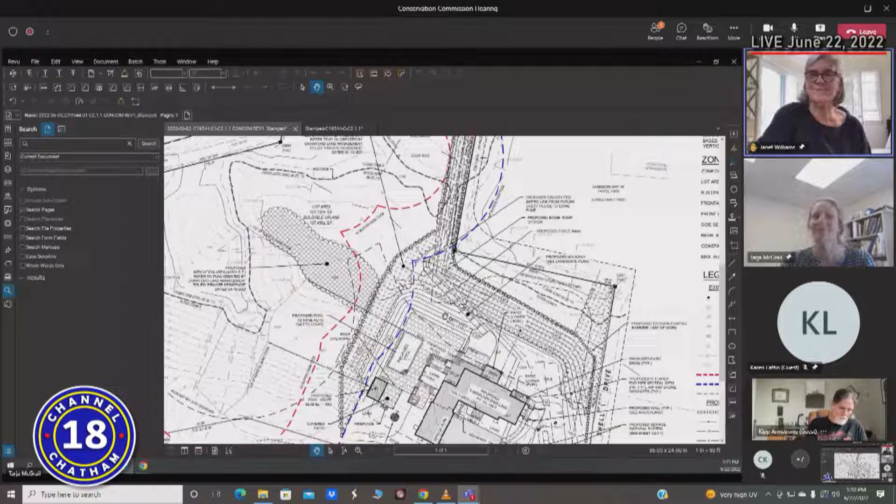Okay, you got another one? Go ahead, just one more question, quick. The mitigation will remain the same, correct? The amount of mitigation, correct? Okay, thank you, no changes to that plan.

Okay, all right, so just to make sure, we don't have a revised planting plan, and that is because even though there's a fairly significant movement of coverage out of the resource area, the location, number, and type of those mitigation plants are unchanged? That's correct. Okay.

Right, there will be no additional vegetation, shrub, or trees cut as a result of moving the path? No, the path is now located in the area that was always going to be disturbed by the utility installation, and that's part of the full restoration area.

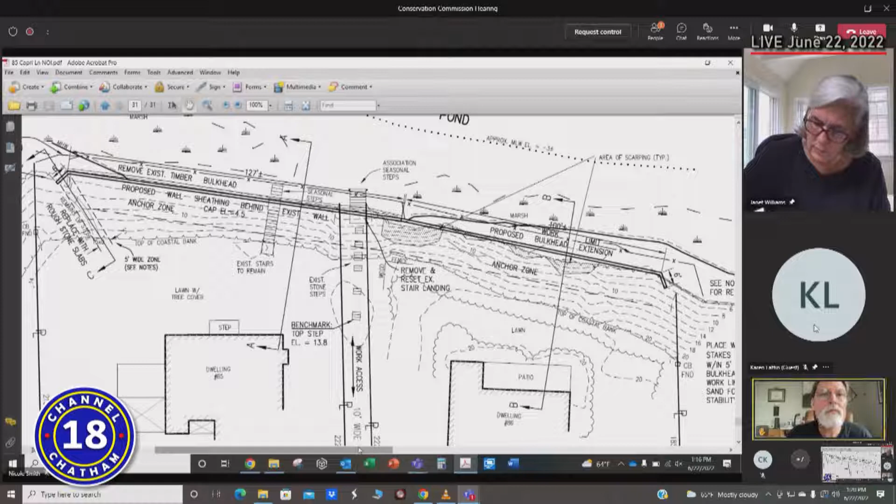The project at 86, while there is approximately 15 feet of the same bulkhead that crosses over the 10-foot strip onto 86, is primarily an extension in a location where there currently is no marine bulkhead. So I'll just describe the area. We've got a coastal bank.

The notice of intent went into some detail about what the bank is comprised of. It's kind of a hard pan material, but there's areas of fill. There's probably a long history here on the coast.

We have a common access for other portions of the neighborhood that goes between these two properties that is currently bulkheaded. There is an aluminum common access stairway in the 10-foot strip. And the 85 property, I'm going to address that first, has its own seasonal stair that comes over the bulkhead and provides access down to the water.

The bulkhead is a horizontal timber. It's not exactly the way you would design one today. I saw no reason to change the coastal engineering structure variety. It's a very low profile, very narrow, effective means of holding the base of the bank. So we basically have an in-kind replacement, but with vertical sheeting instead of the horizontal sheeting.

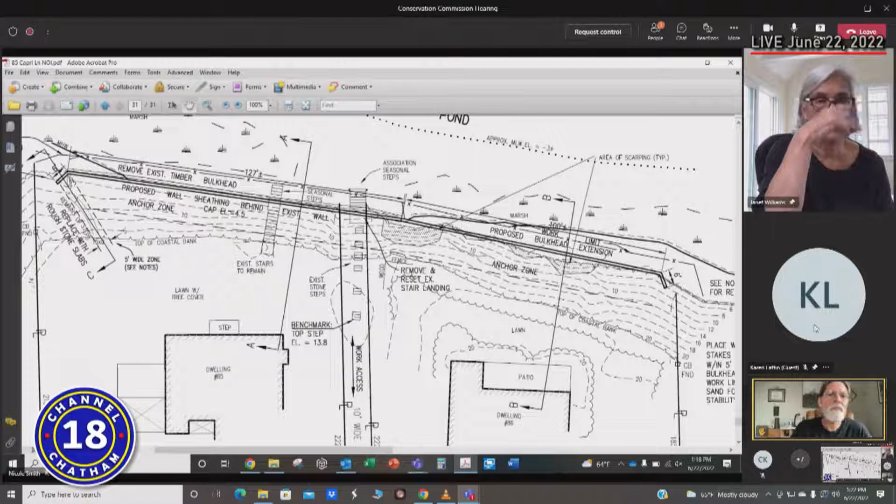I will speak to the way in which this would be constructed in a minute, but I just want to tell you, as we go toward the west, on the left-hand side of the sheet, there's a right angle return. We thought a slightly less sharp return would be better. It accomplishes the same goal. And at that location, there's a rather old but existing set of in-ground steps that had provided year-round access to the shore.

It is a difficult shoreline, but there is, I think, some reasonable access that can be afforded by this year-round access when the other stairways are not in place. And in discussing this with the owner, they asked for the in-ground steps to be included in this application. So we did, and we've included that basic description in the notice of intent.

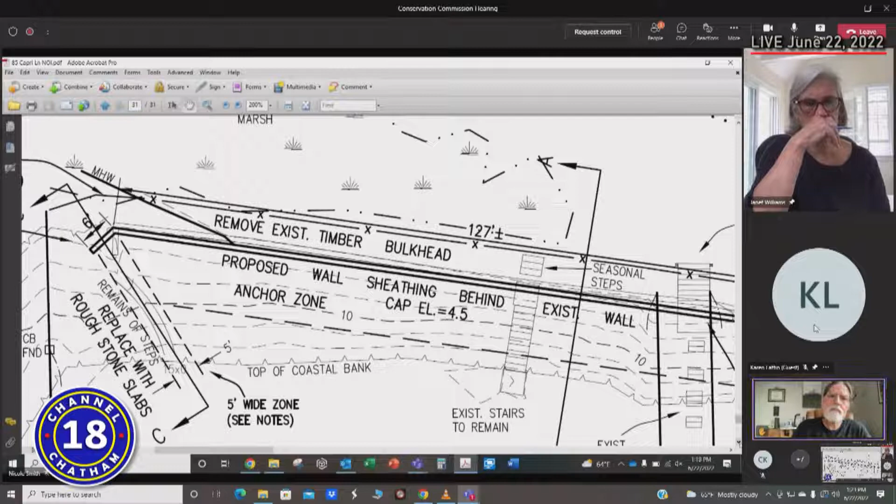I'm going to go from left to right. That set of steps today is concrete block units. They would be taken out, pretty much handwork. The area in that narrow gap would then be accessed using a dingo-type apparatus.

It's pretty much all downhill, and simple block units, but not concrete, likely some form of a stone rectangle, approximately 2.5 feet long, 8 to 10 inches in height, maybe 10 or 12 inches in width, would be laid in place. Mostly handwork, but a very small loader-type dingo would have to deliver those, I think, to do it safely.

Then that area, having been altered to have that work done, would be seeded over with native seed. We know that the soil is very suitable for recovery. It's of a clay content. You can see the thickness of the growth in the area. A lot of it's invasive. There's no practical way to remove those invasives without going hog wild on the bank.

And with the bulkhead, there's no instability caused by the invasives. It's really undercutting from storm tides. So, put very simply, that's the stone step portion of this project, and we can talk about it if you have questions, as you might.

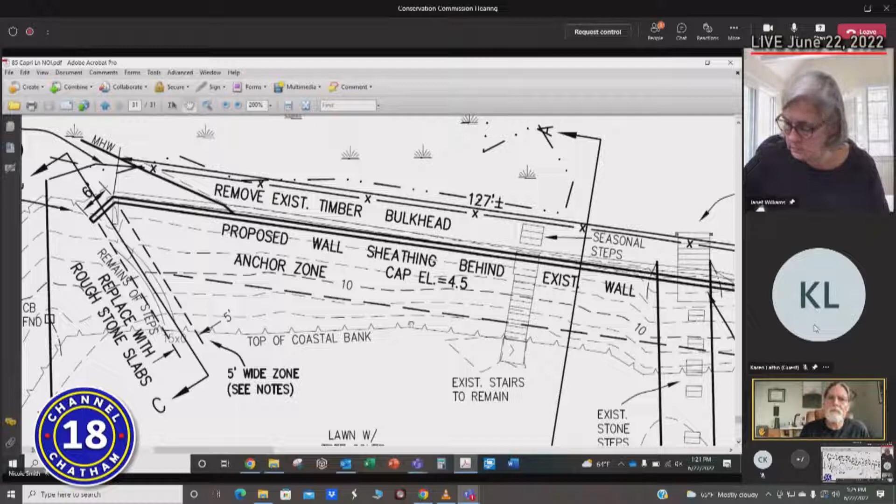So it limits the type of activity that would go on at the base of the bank. There's going to be men working down there. The crane can handle the hoisting and the vibrating in of these sheets. These are fairly short sheets, 10 feet. They'll be out of the ground about 4.5 and in 5 or 6. They could be as short as 8 to 10, but I think right now we're specifying 10.

There's no pilings. It's just a horizontal timber waler that would be Greenheart wood, and then helical screws into the bank.

Should there be the need, and I think it's just a safe call, we're proposing portable fiberglass mats to be laid down along the water side of the bulkhead. There can also be a sand deposit placed under those mats. The bank isn't a huge sediment source because it's been bulkheaded, but it's also made of clay. So while there's some sediment in there, my belief is that there's no harm to a certain amount of sediment that would go into that area.

We have some salt marsh. It's indicated on the plan. So the mats would provide protection from foot traffic on the salt marsh. It's not out of the question that a small machine would have to operate down there.

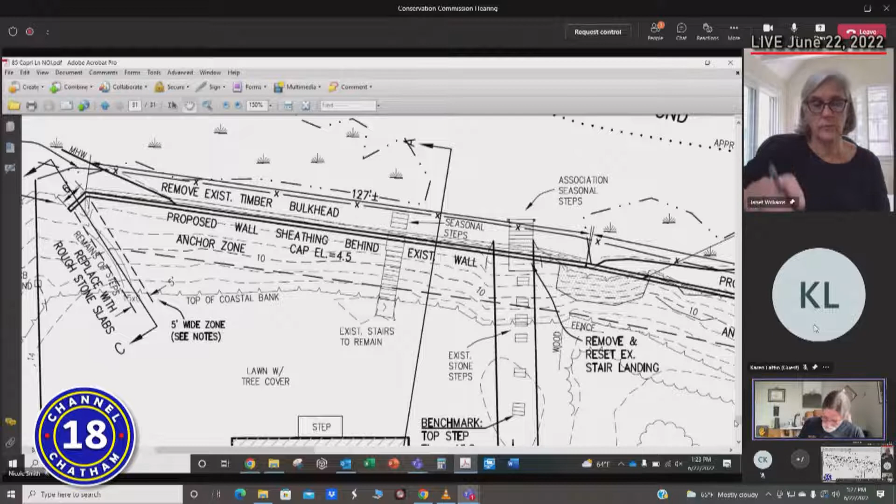So it's a remove and replace project. Most of the components can be hung and installed into place. There will be handwork, and there's the outside possibility of a machine. The mats, which have been used routinely in similar cases, would be deployed along with a sand dose. So that's the summary of 85. Since you invited me to talk about them both, I'll move over to 86.

Now, to the right side of our sheet, we have some rather severe scarps shown on the plan. The plan doesn't really do it justice. They're quite steep, and there's a slight amount of perched water coming out of these areas. There's a lot of wrecked vegetation, and a lot of that vegetation is collapsed. There are 2 black cherries that have fallen over. They're still alive, but they've fallen over out onto the marsh.

The bulkhead line that's proposed really best fits the contour of the shoreline shape. So we're going through a couple of hummocks of soil, but we're also outboard of the bank in a couple of spots. Depending upon the condition of the bank at the time the job starts will dictate exactly where it goes. Those black cherries are in the way and would have to be cut and hoisted out by the crane. Since the crane can haul anything in, it can certainly haul those segments of those trees out. So there's a preparatory step that must be taken along this reach of the shore.

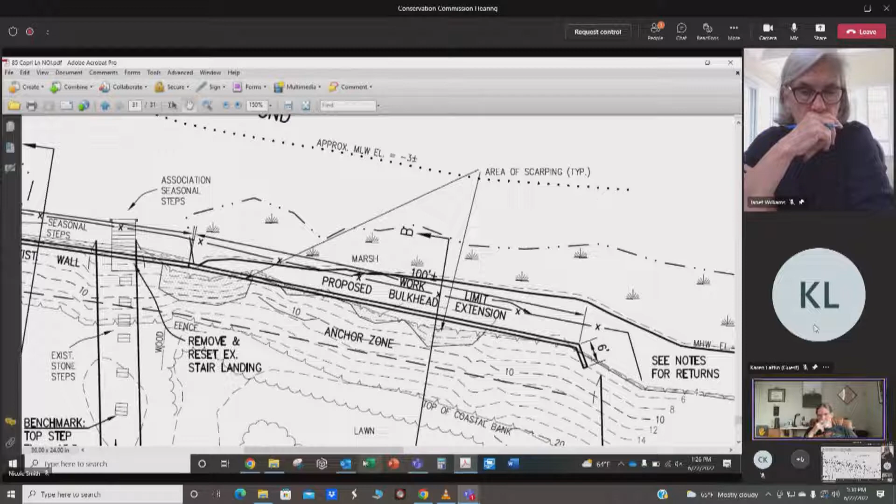So our effort here with you is to provide an introduction to this project, to describe how we've considered how it would be built. We've talked to the contractor, who's very likely going to be the contractor. We have done it before in similar cases, and so we did put an outline in the notice about the performance standards issues that relate to the coastal bank, the coastal beach.

We have 2 homes here. The one that's primarily important is 86, which existed well prior to August 1978, so we don't have any collision with the 1978 rule for either property. I believe the owners of 86 are content with the common access, so there's no stairway proposed here.

Anchors, those would be helical screws, and there's no excavation associated with doing that, except at the very, very top of the revetment, where there is a little need to get to that point behind the main waler.

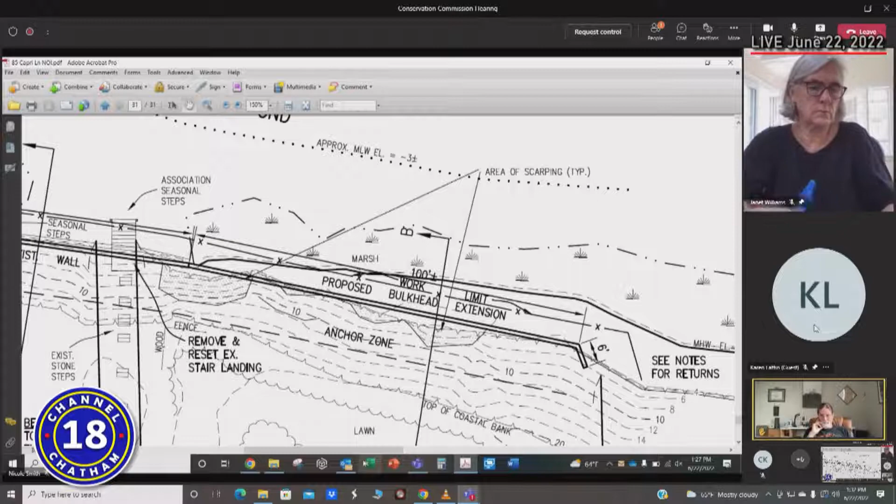So there's a summary. I've probably taken enough time telling you about it, and I'd be happy to answer your questions. Before I forget, I know Jane Lenahan is in the audience tonight.

Oh, Rich? I haven't seen them for 6 months, so I can't say I recognize them as much as I should. So that's our presentation.

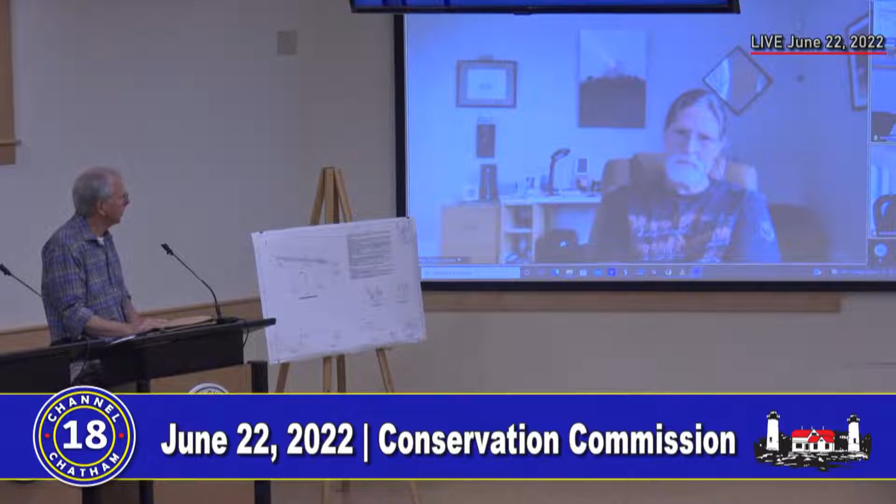And I agree that the tide range changes are due to the barrier beach changes, but also the federal channel does allow water to come in more efficiently, so you will get a tide range change there. There's not much more I could add. We can look at the end of this and take it a little bit farther from the lot line, just to think about your concerns, to try to allay any outright concern.

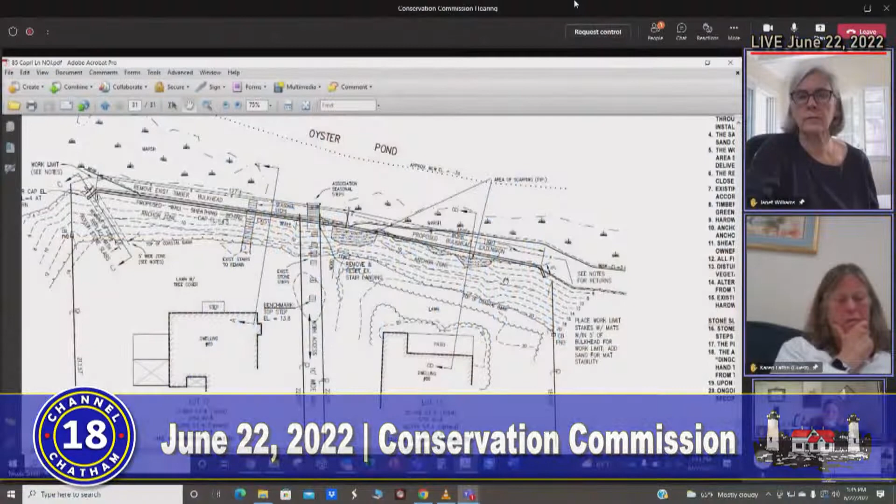Thanks, Bob. I have a quick question, Bob, on 85.

I will tell you I had a very hard time. In fact, I could not locate the existing concrete steps going down the bank because of the overgrowth in that area. I hear you that it's mostly handwork, but since they're set in the bank itself, it's a significant impact on the bank. So I'm wondering what the justification is, given that this property has its own private staircase as well as access to an association stair.

Good observation. I went back to stake those stairs, and I had to hunt around for them also. We did stake the top and the bottom. I did see the top, but then I could not see any further. I started down to see if I could locate them, but I wasn't going to take the chance of heading down.

I admit, and would be the first to tell you, it's one of those things that is in place today. It may be revealed again someday when the vegetation changes. But it was the applicant's wish to see included in the application that we addressed it for purposes of reclaiming them. And we'd need to find out how you feel about that, as well as what would be the likeliest outcome if these steps are replaced.

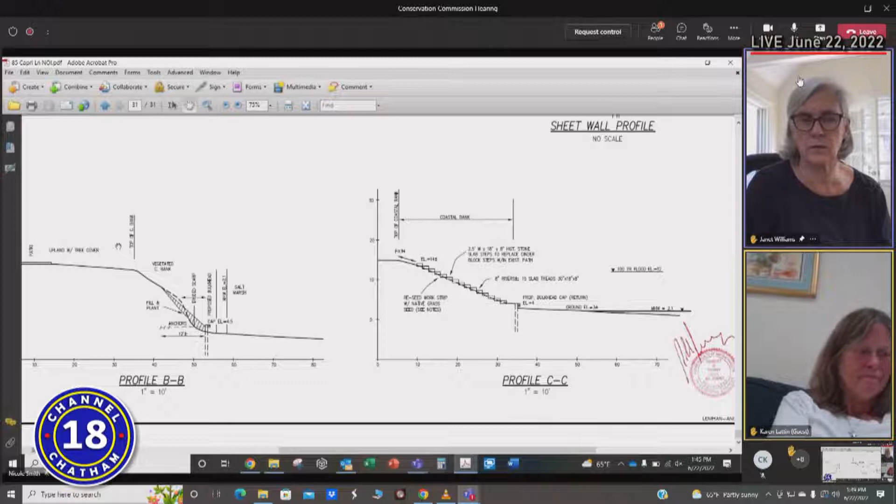What is the proposed height—is it going to be the same height as the existing timber bulkhead, or you keep referring to it as a, what is it, low profile? Well, what is the height?

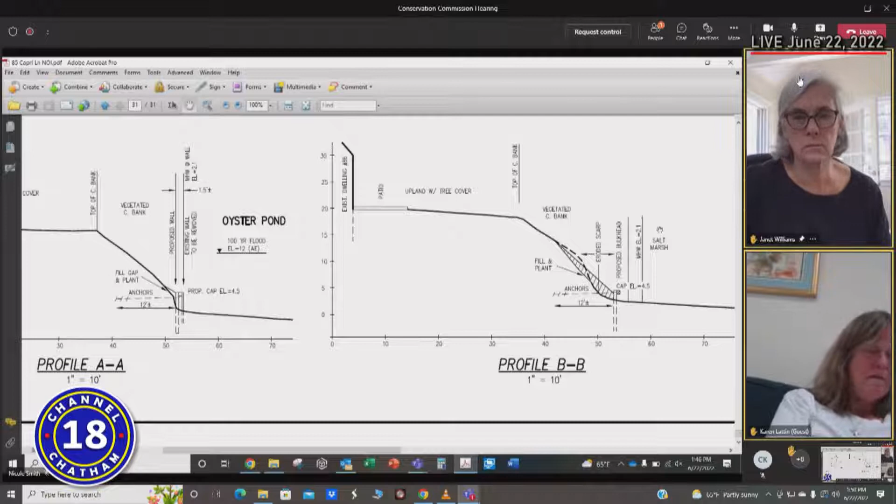Well, it'll vary because the beach contour varies. It goes from subtidal, intertidal, to above high tide as you go to the west, and the same type of rise in the ground occurs as you go from west to east on number 86. The cap elevation is 4.5. The beach elevation ranges from about 1.5 to about 2 and change. So the bulkhead today ranges between 4 and 4.5, a little uneven. So it will appear to be approximately 3.5 feet to 4 feet above the mud line or the sand line. Okay. My preference, since the soil is difficult here, would be it's a product that is a composite.

It's not plastic, it's a composite—about 3 times the strength of plastic. It's a dark, charcoal colored composite sheeting. We're trying to minimize the parts and busyness of it, so it's really just a line of corrugated sheeting, dark in color, which would be preferable. It won't stain, and I don't think it'll jump out at anyone, with one timber frame waler along the top. So you don't see very much, but it's effectively the same shape you've got there today, except the sheets will go vertically instead of horizontally.

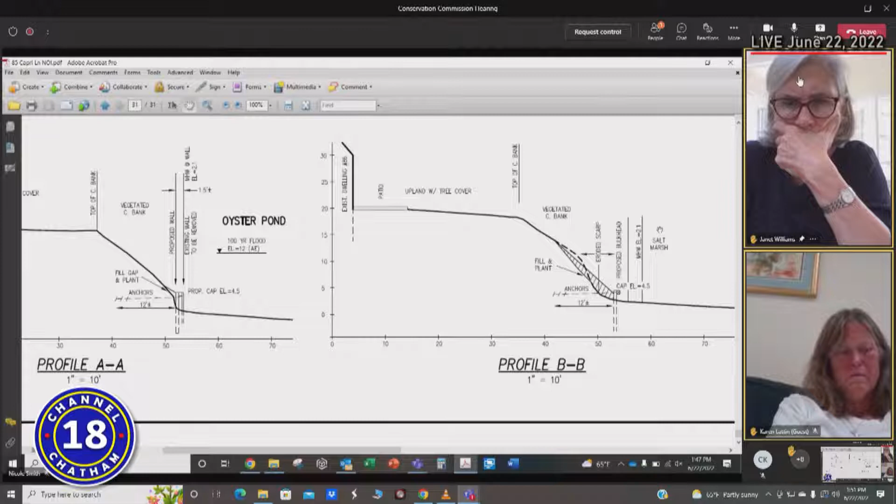Okay, and so since the flood elevation is at 12, and this is significantly low, how often does this bulkhead get overtopped by water?

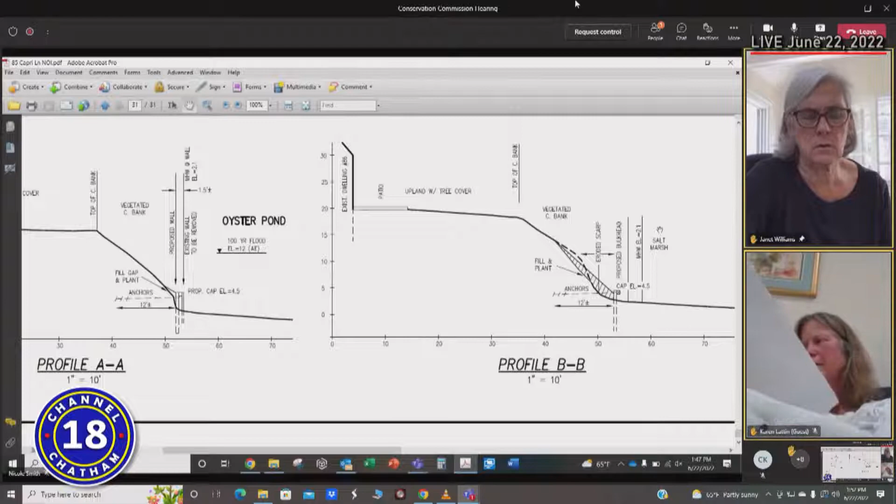Good question. I think it's safe to say, and I've not been told otherwise, that oftentimes the property is not occupied during our winter northeast season. I believe the flood elevation at this site is a hurricane-related flood, whereas northeasters would more routinely push water into this area and into Nantucket Sound and around Stage Harbor, so a common strong northeaster flood in the Nantucket Sound area is around 6 to 7. It's got to go through restrictions—come in through Stage Harbor and up the river and into the pond. I'd be surprised if we saw flood elevations much above 6 or 7 on a routine basis. But the flood elevation listed by FEMA, related to the strong hurricane that could arrive here, is 12.

But in my experience, I've found that a low buttress, provided we have good timing—I had one case in this town where we tried to make a low buttress of stone, and the day the job was finished, a northeaster came in and wiped it out. But if we'd had a couple of years to grow vegetation, it would have been an adequate level of protection.

Our belief is that we don't want a tall wall here. A revetment, for example—we did submit an alternatives discussion—a revetment would be fine, it's just that it occupies so much real estate, requires open excavations and machines. This is more elegant, surgically installed, and is the right application of a CES for this particular location, in our opinion.

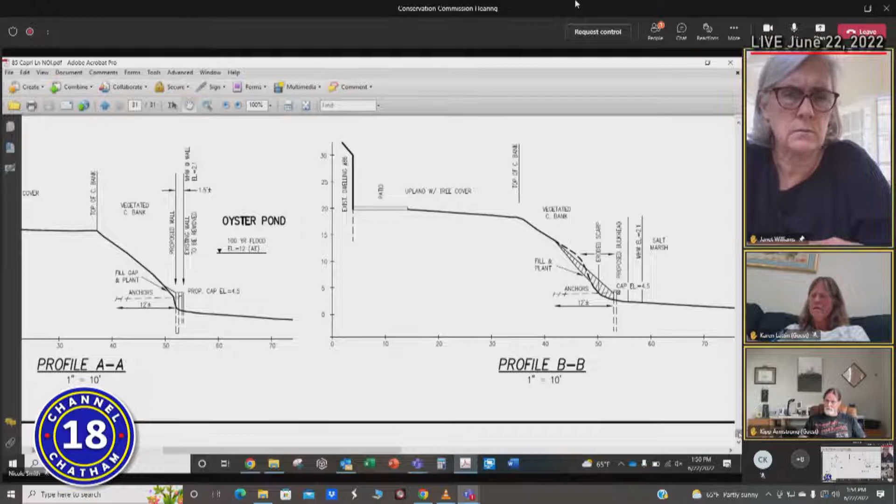I think it's overtopping. You see how the bulkhead is starkly open on the east side. If you go down to that landing and take a look, when you do have overtopping storm tides, that water's trying to get out, and that's really the function of a return, which is to close the bulkhead into the landmass. You've been there—you can see this bulkhead just ends. There was no return. So if you've visited any of these walls during a strong storm, you'll see water trying to get out of the bulkhead backfill, and it's running like a river.

Excuse me, Bob, let me see if I can get some— whoever's not muted, please mute yourself, unless you are Bob Perry. Can you hear me? Well, Nikki's going to try and mute him. Go ahead, okay, both of these mics are on. Is that the problem? I don't think so.

I think the overtopping, when it occurs, needs to get out, and if you give it a way out, it'll run like a river and it erodes as it moves. Otherwise, I don't believe overtopping erosion over a low-profile CES would cause a lot of erosion if it's vegetated. But the problem is that period of time between when the vegetation takes and stabilizes it.

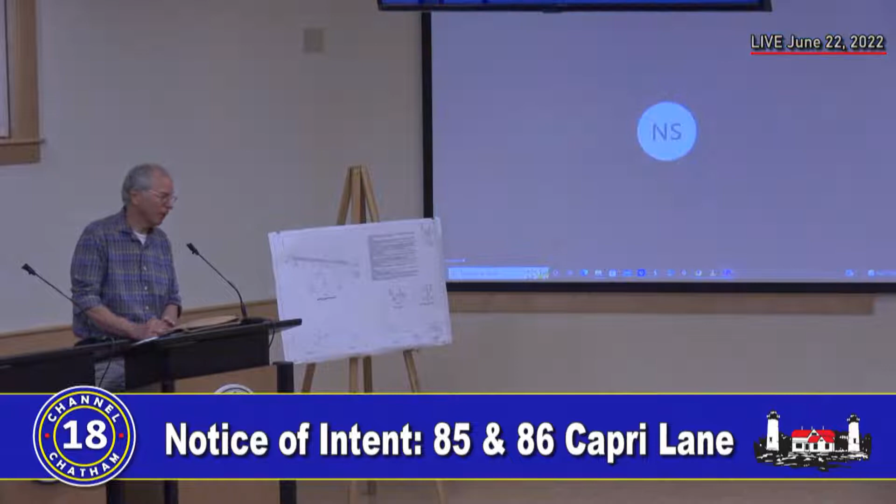I too am questioning the set of stairs at 85 that you can't see because they're so overgrown. I feel like there are other stairs giving them access, so I'm questioning that too. I also noticed there are quite a few boats on the shore, and they really shouldn't be there. Is there any plan to take care of that? We can certainly discuss that with the owners. I know there's more than just two families here, there's a common access, so I will have to look into who owns those.

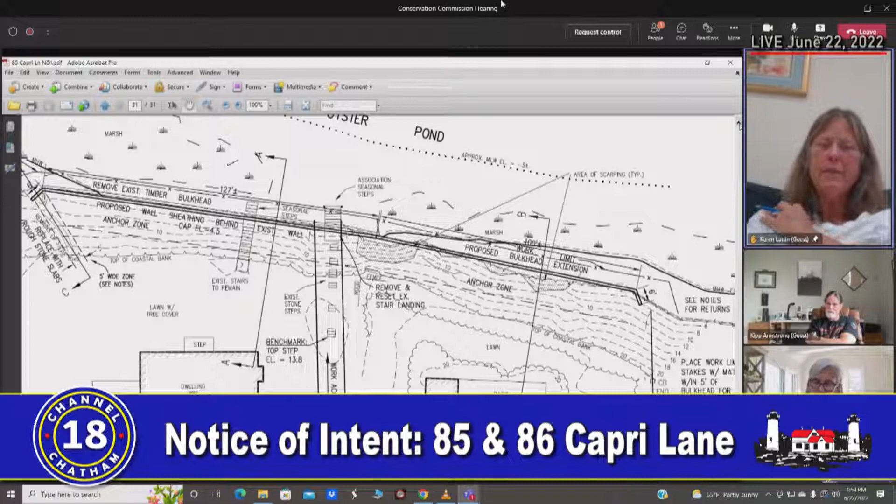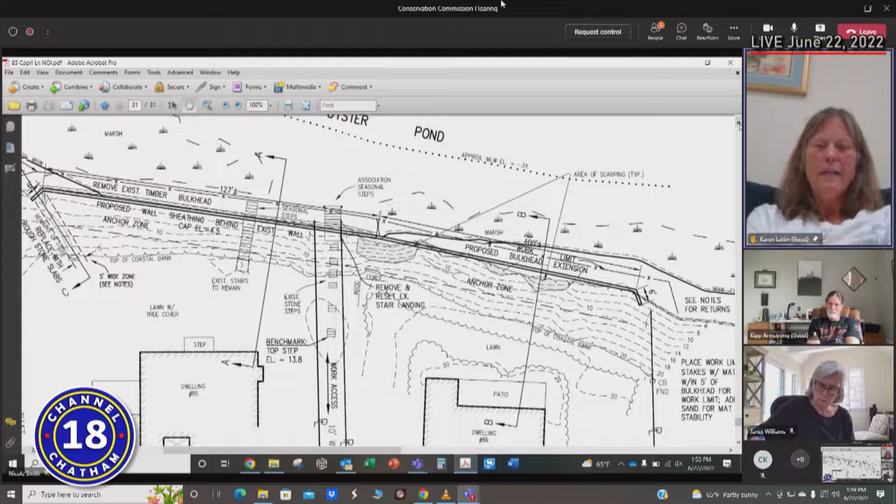Because the boats shouldn't be on the shore. And I too would like to see something done about a lot of the invasive growth on that bank. I would love to see that be part of this project, since, as you said, the beach grass will probably not survive with the invasives there. So I'd rather see something that should survive be given that opportunity. That's what I had.

Okay, thanks Karen. Well, I guess that's me then. So, Bob, what is the distance between the existing bulkhead and the new bulkhead? The existing bulkhead crosses through the 10 feet, and it's something I could point out to you. About 15 feet past the common strip, the existing bulkhead ends, so there's approximately a 100-foot proposed extension. No, sorry, I'm talking about the horizontal distance. What's the gap between the two?

Oh, well, we are stationing the new one inboard. Is that what you're getting at? Yeah, it looks like from the plan there's some distance between the old and the new. It's imperceptible, perhaps the width of the wall. We just didn't want to encroach, it's a choice that I made. So there's virtually no distance between the two? Right. And you're putting the new one in first and then taking out the old one? No, it's just that there might be a choice to leave some of it. It's really just a call, one of those things I tend to put into applications that further prevents encroachment toward the tidelands. If we're governing the placement of this wall to be at the location or landward, we're not encroaching. So it's really a choice we put onto the plan.

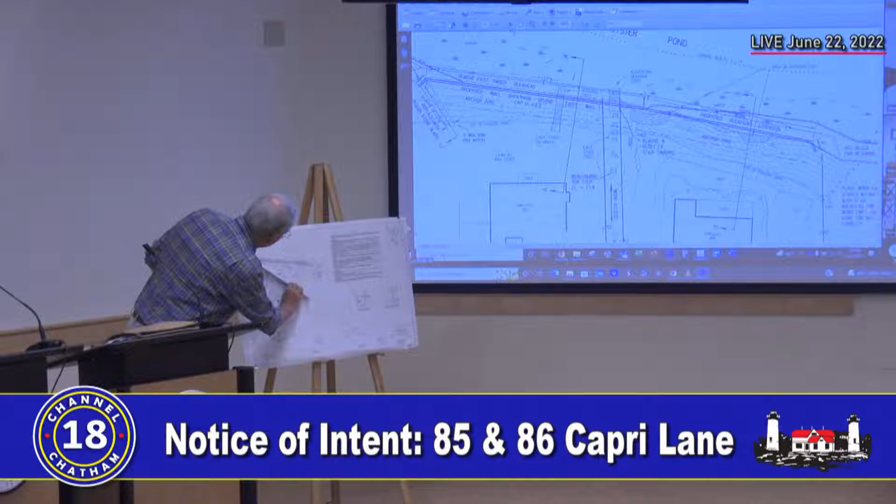The hydraulic torque machine might be done with a small machine on the beach, on the mats. But the bulk of this project, if it can be done, which we've done before, with the crane - most of it being done by the crane just absolutely minimizes the type of activity that you get into on one of these jobs.

On the ground, I'm glad to hear that it's got that sort of reach for the project.

The mat idea would be in case you needed a light-duty machine, whatever you want to call it - dingo, bobcat, whatever - on the beach for the seawall. That's a rubber-tired mini excavator, probably 5 to 6 feet wide.

You've tried this technique before and successfully, where you lay sand on a marsh, cover that with a mat. When you remove the mat, the sand's still there, but won't the marsh sand get washed away? Yeah, it's a great point you're raising.

It's important to understand that if you're going to be hem-stitching these areas of salt marsh, beach, and quite a bit of marsh, you're not going to be on that mat very long. So the articulation and any kind of movement isn't going to be long duration on the marsh. We believe a thin layer of sand with the mat, then you get it cleared off, and the tide will redistribute that sand around.

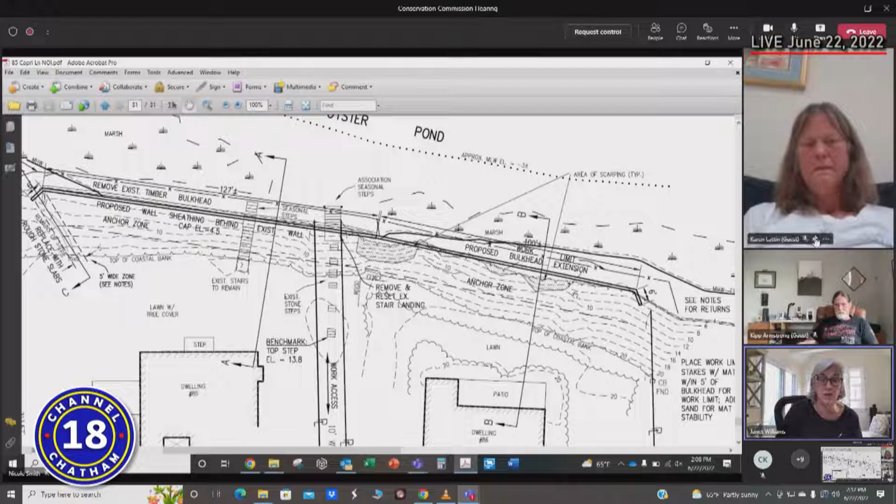Sorry, I just wanted to follow up on the point you were just making, Bob, and that was my other question. I noticed there was no mitigation, and I was thinking about, given that this is an installation of a sheet bulkhead and the whole design is to be minimally impactful, what would need to be mitigated for? And I think you put your finger on it when you said any vegetation that's removed, regardless of its current condition, should be compensated for.

And I would add to that the impacts associated with the installation of stone steps, which I still don't feel like I'm going to be able to support, but if I get there, that does have impacts that should also be compensated for. I noticed the lawn on the property goes straight to the top of the bank. There's no vegetated buffer strip at all along the top of the bank. So maybe something along those lines might make me feel better about the activity associated with those stone steps.

Okay, thanks, Karen. Janet, I mean.

So it sounds like we have some thinking that needs to occur. I've been taking mental notes, and I understand your questions and concerns. Our job is to get with the applicants, discuss the meeting, check in with the restoration experts already on site, and come back with a few changes, one of which would be to look at the east end, look at mitigation, and discuss the steps on 85. I know no one's doing any work on this property this summer, so a month might be a good distance to continue it for, rather than two weeks.

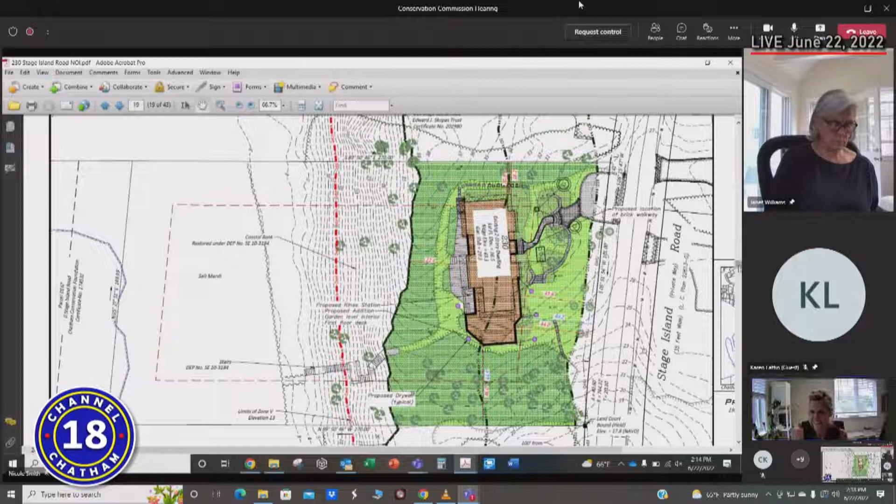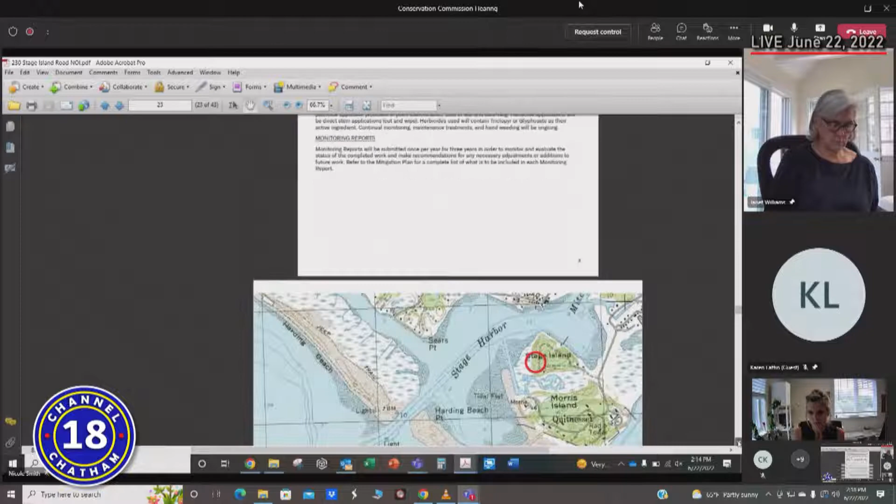Nikki, would it be possible for you to bring up our plan? Yes, I believe so. Is it in the same package? I believe so. Okay. Oh yep, there it is. Sorry, I'm just going to stop sharing for a second. No problem, thank you.

I guess I can still probably get started while you're finding that. Sorry, our end of the project is pretty simple.

There is some naturalized area within the limit of work that will be necessary in order to access the end of the house where the addition is going. With our plan, we've shown the area that will be disturbed. It will be revegetated at the end of the project so there's no net loss of naturalized area on the property. We do have a small addition in overall square footage, which requires around 150 square feet of mitigation, which we've provided.

There are two areas where we're providing the mitigation, since there is a vegetative buffer strip at the top of the coastal bank already that was included in a previous restoration project. So there's one small area towards the north side of the property, right at the top of the coastal bank, which is currently a mulched area, pretty devoid of vegetation. It has a few paver steppers going to that area. It was used historically as an area for a hammock.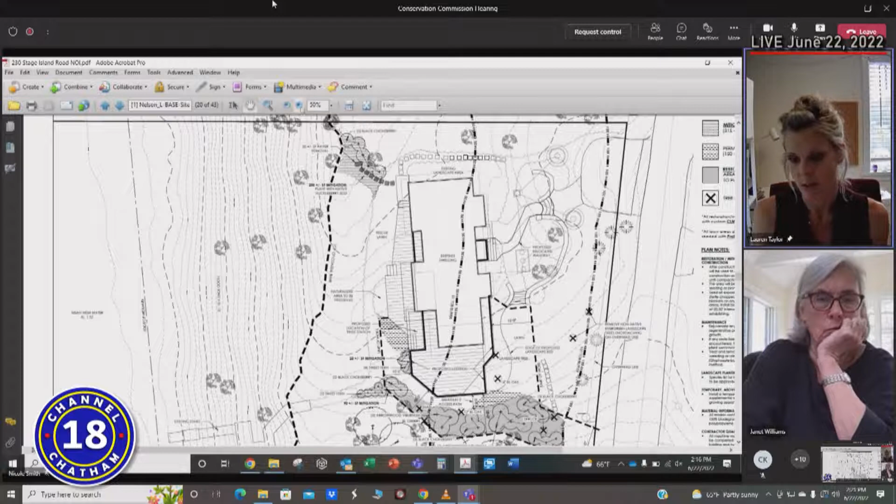The homeowner is no longer utilizing that area, so in order to help with the revegetation and continue the vegetative buffer strip at the top of the bank, we are going to be removing those pavers out of that 0 to 50-foot buffer zone and revegetating that area to knit the vegetative buffer strip back together to be cohesive. The other portion of the project you can see in the light shaded gray area, within the limit of construction necessary for the project, is how we will be revegetating that. We are proposing to leave a 5-foot wide access path so the structure can be maintained around that south side. Our portion of the project is very simple in nature, with a very small mitigation requirement.

There's no net loss of vegetation, and there's an addition overall for the project. So if there are any questions regarding that, I'm happy to try and answer them.

All right, thank you, Jen. I think I'll take my turn going first.

I have two overall themes. One is the number of trees coming out and the number of trees going in. But first, this mitigation area, the larger one, is pretty nice looking as it is, it seemed to me. It looked relatively unsullied by invasives, et cetera.

But what you're saying is that so you can do the construction, you're going to have to get rid of it, and then you're going to have to replace it. Is that what I'm hearing? I can't tell where the limit of work necessarily is on the mitigation plan. Maybe somebody could point it out.

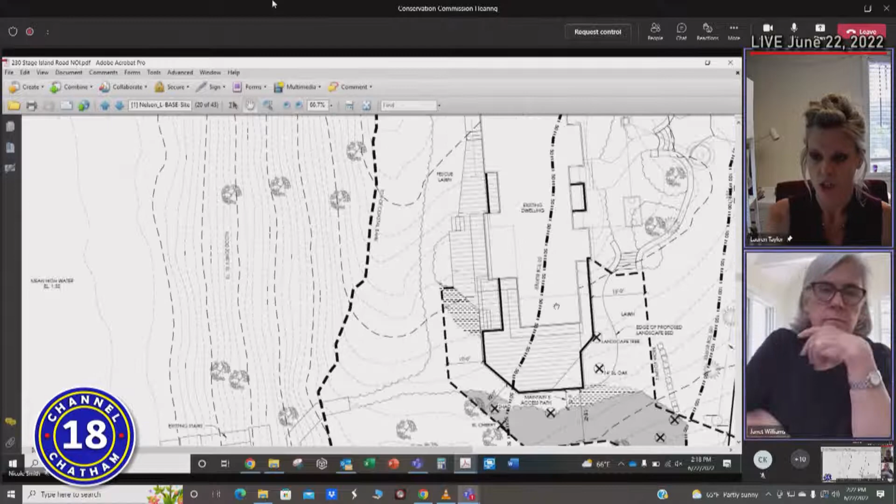So the limit of work and the access for the project is shown in the dark dashed line. Oh, that's the limit of work. Okay, all right. Correct. Oh yeah, I see that now, I see the label.

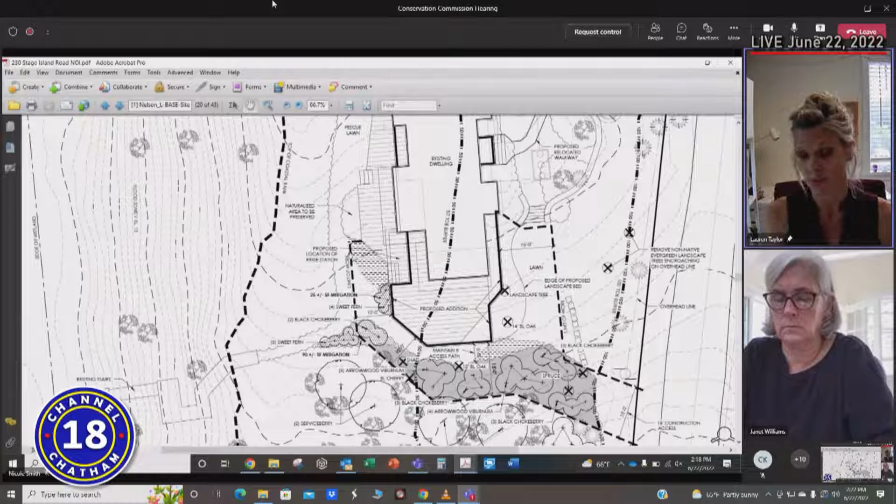Okay, so yes, that area of the property is vegetated in terms of woodland. There is some understory growth there, and it is all native. That's the absolute best place for the construction access to be able to come from. There are overhead power lines running along the street, and there just needs to be area for that construction to take place. So it will be revegetated, and I think it's safe to say it will be revegetated with understory species that are more dense than what is there currently and existing. So overall there will be no long-term adverse effect there, it will just be temporary for construction.

Okay, it's bad luck to be there in the limit of work. It is, yeah. But it is also located almost all within that outer buffer zone into the street, so. That is true.

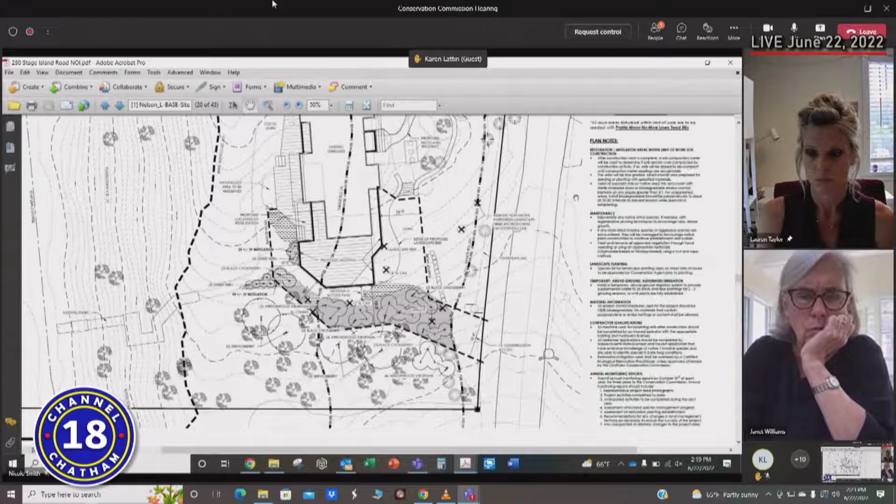So I see on the plan, I count 9 X's. In the narrative, it said 6 trees are coming out, but I'm guessing what that means is that 6 of them are counted as natives and 3 of them are not, so the 3 that are not native don't count in terms of replacement. Yeah, so actually that might just be a typo on our end, actually.

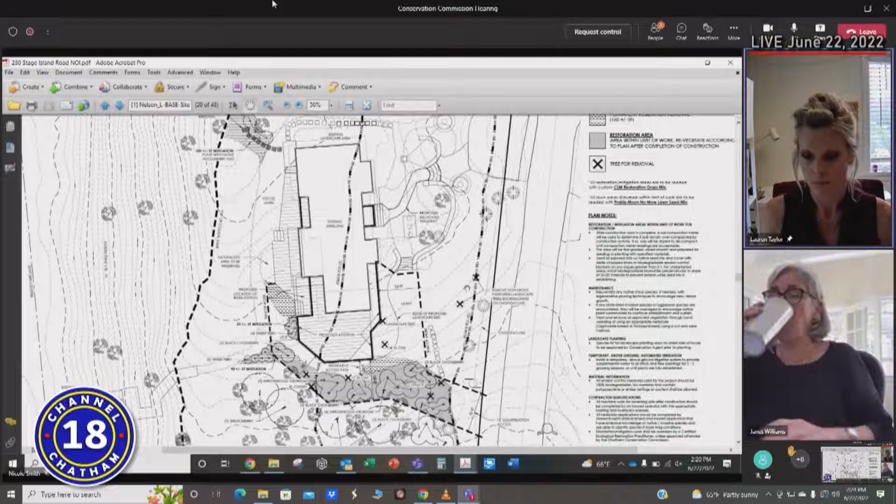But there are 2 spruce trees out by the road growing very close to the power line, so in conversations with the homeowner, we did propose those for removal. And then there is one we noted as a landscape tree, an ornamental species located right on the corner of the addition.

But the native species, native to Barnstable County, that are proposed for removal, we did propose mitigation for those. We proposed to plant 4 trees and 4 larger shrubs in replacement. That whole south side of the property is fairly well vegetated with canopy species, so we didn't necessarily think it was prudent to replace with a lot of large tree species.

We thought those canopy species were already present, and it would be better to help stratify that woodland edge with more understory species, for greater value from both a species diversity and habitat standpoint. So you're thinking that area isn't large enough to support something like an oak with higher habitat value, rather than service berries and viburnums? There already is an overstory canopy comprised of oak species as well as pitch pine species.

Generally speaking, oak and pitch pine are early successional species and tend to support more generalist wildlife species, versus supplementing with understory species and stratifying those woodland layers, especially with some of the shrub species we proposed, which are very beneficial for migratory bird populations, especially in the fall. So we thought that mitigation and revegetation in that form was of higher value than trying to put more oak and pine species in with ones already growing, to be honest.

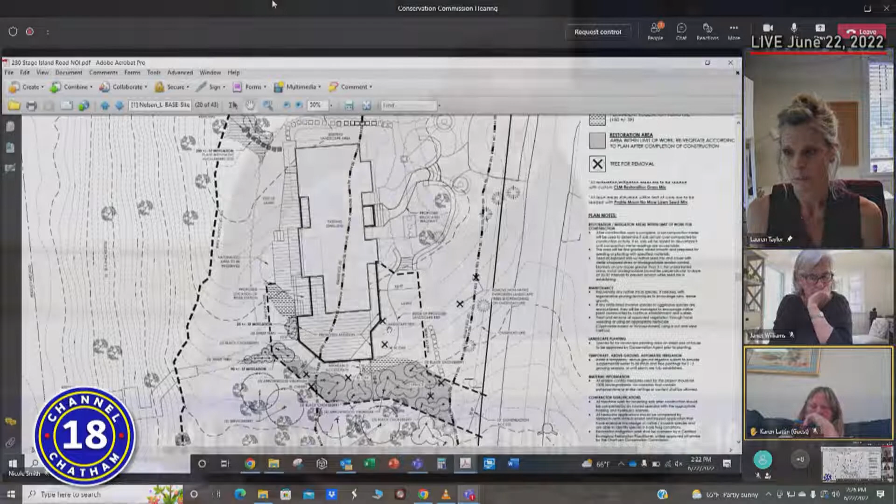Well, just as a general rule, there are those of us on this commission who are acolytes of Doug Tallamy, who has written extensively on how valuable oaks are, how many species of caterpillars and insects, around 600, that they support relative to other trees. It's far superior to any other tree, so I always argue for an oak, always.

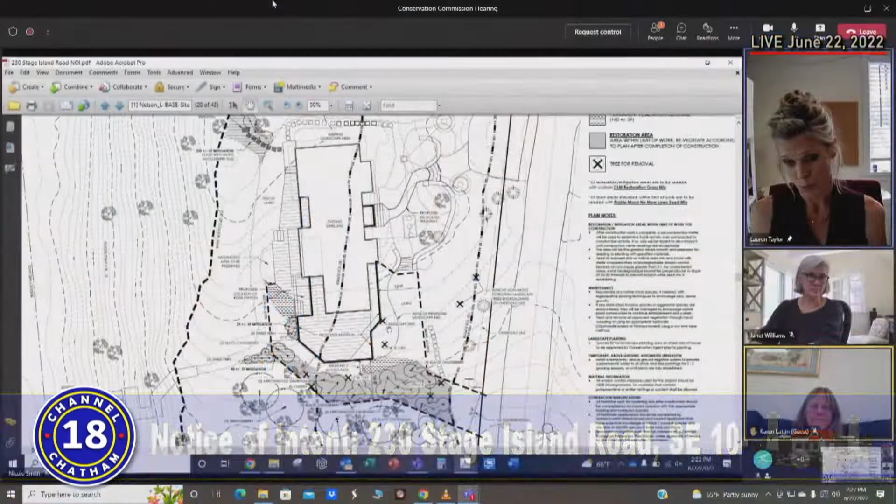Absolutely, and we'd be more than happy, if it's prudent, to review our selection of mitigation species for trees and include some additional or change those species out, if that's prudent. Leave it to your professional judgment as to whether it's prudent given the overall plan and property line distance, etc. But if it's possible to put one in and it seems like a good idea, I'm in favor of it, and I think some of us on the commission are as well. Okay, noted.

Okay, just one more. The rinse station, is there one already on the property, or is it new? That would be new. Okay, so it is— I'm sorry, this is for the homeowner. There is a rinse station already there under the deck. Oh, okay, stand corrected, thank you. All right, so it's already in the NDZ, the no-disturb zone, the 0 to 50 resource area.

All right, that is correct, so we're replacing one with the other.

So where will that water go from the rinse station? We also have proposed 5 dry wells around the south half of the house, to compensate for some of the roof runoff as well. So that's to capture major sources, both roof runoff and the rinse station water. Okay.

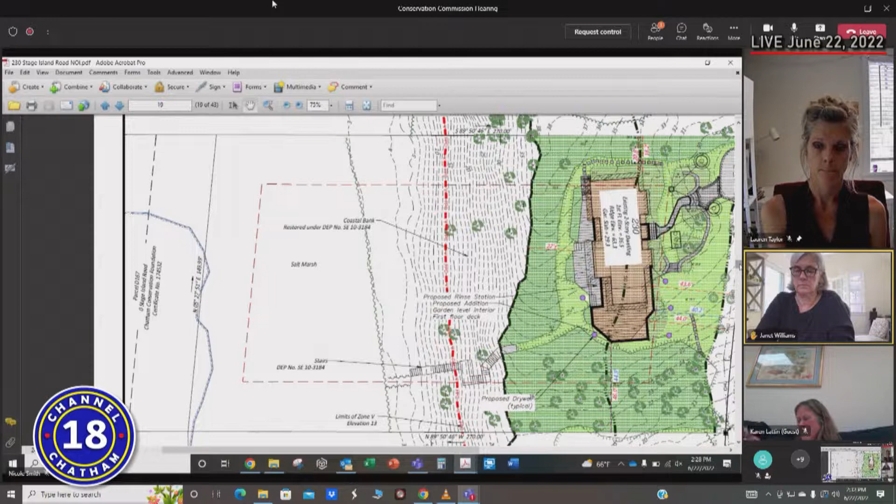So that suggests that it's registered as an irrigation meter? Correct. Right, okay, got it.

Thanks, Bob. I got a question here on the native plants in the new access path - the arrowwood viburnums are pretty beautiful, pretty large. Is there any way to save those plants, dig them up, heel them in, and then transplant them back? It may be feasible that those could be dug and moved. I'd have to review them on site again in terms of their size and whether they're growing directly adjacent to a tree or something like that. It may not be feasible to get a large enough root ball on them, and it would also be dependent upon the timing, but it may be feasible, yes, and I'm happy to review that.

Yeah, because I think they're kind of growing all alone in an area, so I think you could probably transplant them, from what I could see. I think I remember the ones you're speaking of, so yeah, I'm happy to review that on site and get you more information on the feasibility of that. Okay, thank you.

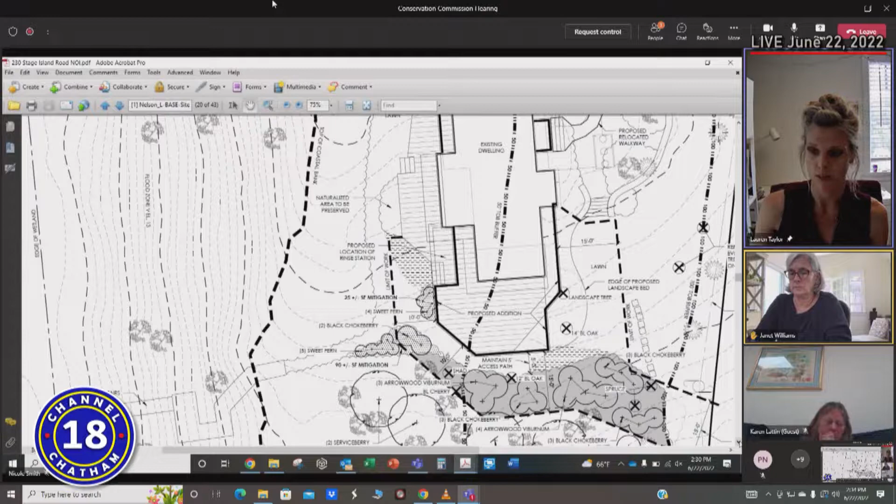Other than that, I think that was it, that was my only question. Thank you. Okay, thank you, Bob. So, where are we, Mr. Duncanson? Sorry, I wasn't going to comment, but I think it's important to get it on the record.

This has to do with your conversation about the rinse station. My recommendation is always not to use dry wells in situations like that because they're only rinse stations, it's only water. My recommendation is to just let it go onto the ground or do some kind of a gravel pad or something like that. We're always trying to get water into the root zone, and unfortunately when we do dry wells - and the same thing holds for roof runoff - I'm no longer a firm believer in doing dry wells. I think we should look at rain gardens and keep that water up in the root zone. It's more beneficial to the environment and the plantings. So just a suggestion for the commission to consider when you get faced with things like roof runoff or rinse stations or even outdoor showers. I think the best thing for an outdoor shower is to just let it go onto the grass, provided it's in an area where it doesn't result in erosion or anything, and let Mother Nature deal with any soaps that may be present.

So just a suggestion. Well, I'm with you on that, Mr.

Duncanson, I'm with you on that, except for the soaps part. Pat Eldridge.

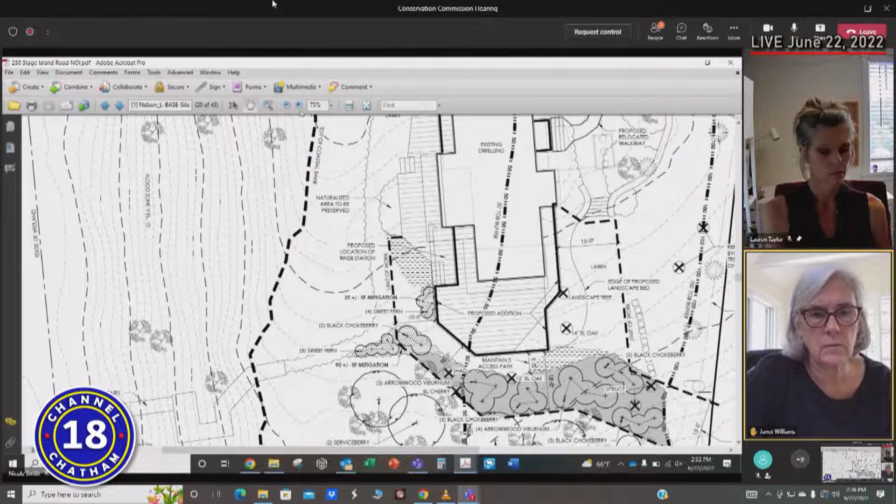You would have to regrade in order to put in a rain garden instead of dry wells? Or just to have the rinse station. So there's the proposed location of the rinse station, you can see the arrow. Below that, there are 3 stairs, so they're going to be stepping down to the basement level, turning left, and they can go into their rinse station.

Again, we'll have the gravel base so that the water will go through. We'll have the dry well for, should things go awry, it doesn't go into the basement. From those steps, if you go straight, you're going into their basement. But the grade outside is just 1.5 feet higher than the basement floor.

Okay, well, I'm on board with the general suggestion, so you convince me where we can go for a rain garden, keep it at root level, keep the runoff at root level. I said we tried for it on this one, but okay, we ended up painting ourselves into this corner and went forward as best we could.

All right, Janet, do you have a new hand? Yes, before you walk away, my question is for you, following up, asking you to clarify what you said about the lawn on the water side.

When I stood there, the stake that I looked at that said lawn area, looking at your plan, it's at the top, no, go back up. Can you go back up, pick up the steps, the area of the steps heading down toward the water? Because I was walking along the top of that steps when I turned and saw the stake right there, right about where the pointer is now, in a naturalized area, and it said lawn. So I'm trying to understand, it's outside the limit of work, and what is coming out of that area that's going to be lawn, or is the stake in the wrong location?

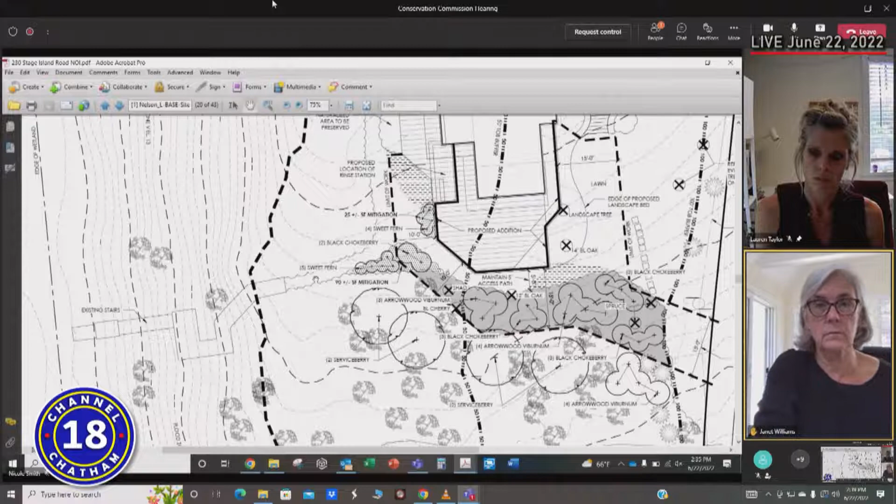So just a 1 or 2 page addendum to your land management plan to consider the vegetation things that we discussed. Other than that, it looks like it's mostly just things that will come up in the order of conditions, such as the gravel pad and maintaining the 4-foot path and things like that.

So with that, I would say July 6th, I believe it is, for an order. Yes, the 6th. Okay.

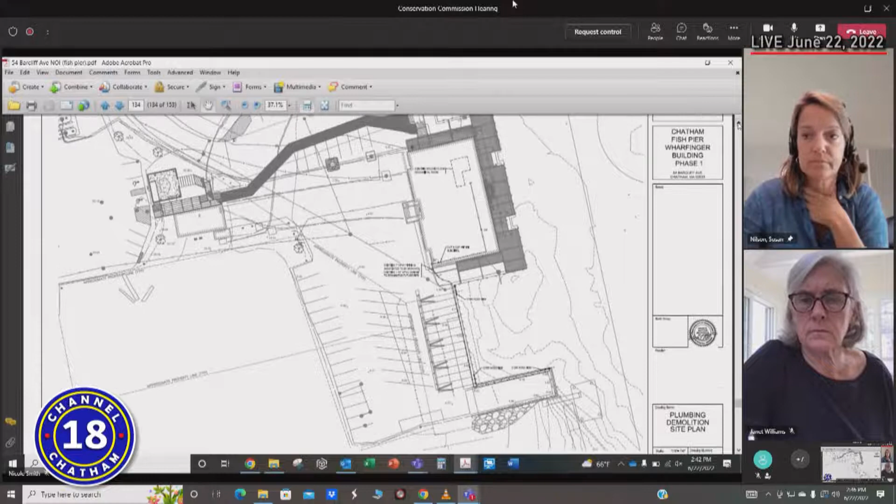So those are the major highlights, along with rebuilding the observation deck and the stairs around the Wharfinger building, and also adding a sidewalk on the access road coming down from the upper parking lot. Because we have a lot of families with strollers, and now the only way to get down there is either carry down the stairs, which people don't do, or walk down the roadway where we have tractor trailer trucks maneuvering.

So with that brief introduction, I will turn it over to Susan Nilsson from Foth, who can walk you through some of the more detailed aspects of the plan. So, over to you, Susan.

All right, thank you very much for the introduction. I think what might be most helpful is I have a presentation that I can share, and I'll go through some of it fairly quickly because Bob gave a great overview. Let's see if I can do this. I'm just on one monitor, so excuse me if it's a little bit clunky.

How's that? Yep, we see it. Yep. Okay, great. So I will be looking at the presentation, not at you, so please feel free to interrupt me if you would like.

So first, just order of business. I did find a file number this morning on DEP's website, so that might have been newly posted. But we're here today to present the site improvements, which were described: the bulkhead and pier oversheeting, walkway, timber stairs, landing, as well as the sidewalk.

So I wanted to just give a brief location description. I think everyone's probably pretty familiar with it, as well as an overview of the project, the alternatives analysis that we looked at for addressing the bulkhead, wetland resource areas, the reason that we're here before the commission, and then touch upon the construction methodology and protection of those resource areas, and then open it up to questions and discussion.

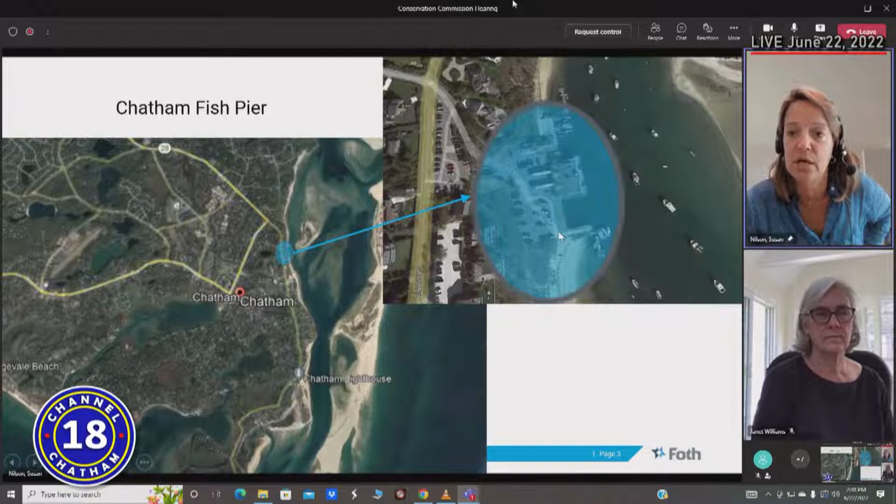As Bob said, it's one of the most, or second most, visited site. So I just wanted to highlight for those that might not be familiar with the location. It's shown here on a large scale plan, and then as you zoom in, you can see the building and the South Jog and Barcliff Ave extension that comes into the site.

The history of the site is that the original facility was constructed in the 40s, and the South Jog bulkhead that we'll be talking about today was constructed in about '76, hence the almost 50-year service life that it's provided, and we can refer back to this site as we look at the different features.

But I think it is important to recognize that it's not only the commercial fishing—there's recreational boating, the Coast Guard, harbor master vessels, as well as the large pedestrian use of the site that we're looking to make sure we accommodate with the improvements and maintenance activities.

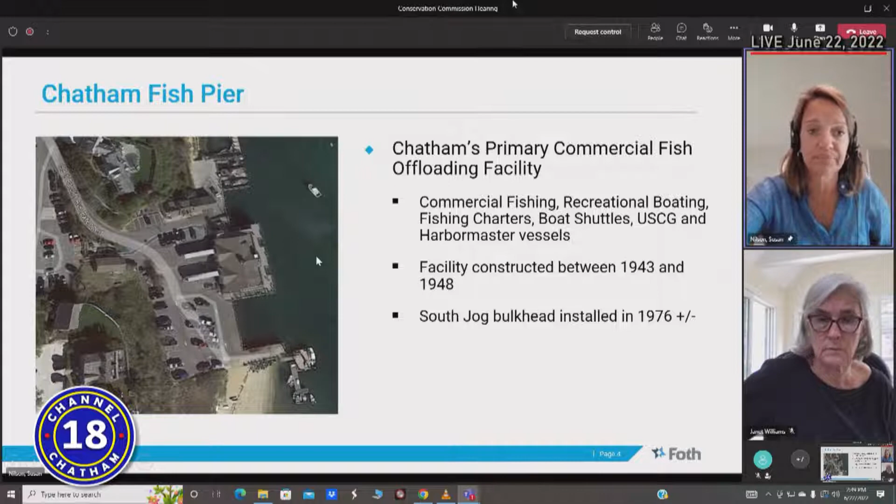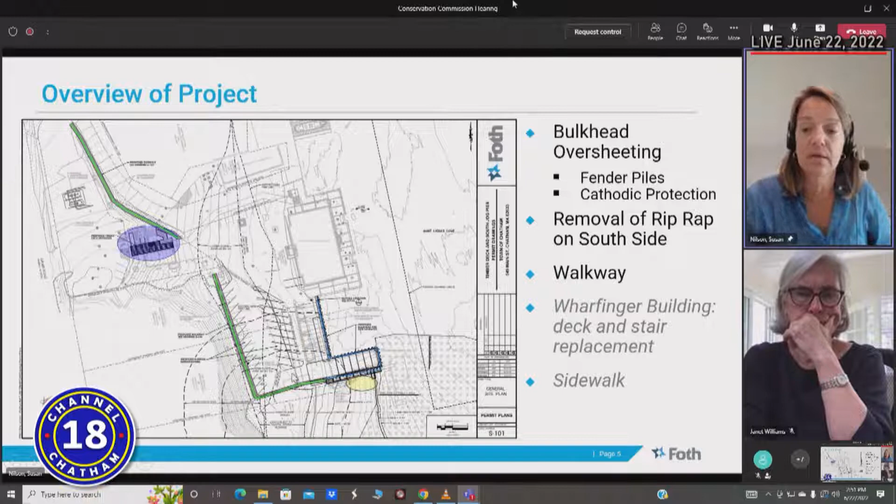For the bulkhead analysis, the first alternative we looked at was to do nothing, and that really does not meet the project goals. It doesn't address the deteriorating condition of the bulkhead, and it wasn't considered further. We don't think it's an option to do nothing without having serious restrictions on the use of the site. Alternative 2 was to install the new steel sheet pile bulkhead landward of the existing bulkhead.

We just heard another project that spoke quite a bit about that approach, but I want to point out this is a quite different situation. At this site, we have sheets approximately 50 feet in length. We're in a velocity zone with exposure to wind and wave action. We also have an existing bulkhead system with a tieback system and anchors holding up the sheets.

So in order to install landward, you would place significant risk on the structural stability of the existing bulkhead, as well as having to excavate to take the pressures off the bulkhead in order to cut any of the tiebacks. We felt like the larger area construction combined with the risks, as well as the higher construction costs, did not make that the preferred alternative.

So we looked at alternative 3, which is oversheeting - in other words, placing the new steel sheets directly seaward of the existing ones. It does have a slight encroachment, limited to the width of the steel sheeting, about 20 to 24 inches of that corrugated sheet. We think doing that with ground anchors and tie rods is the best approach.

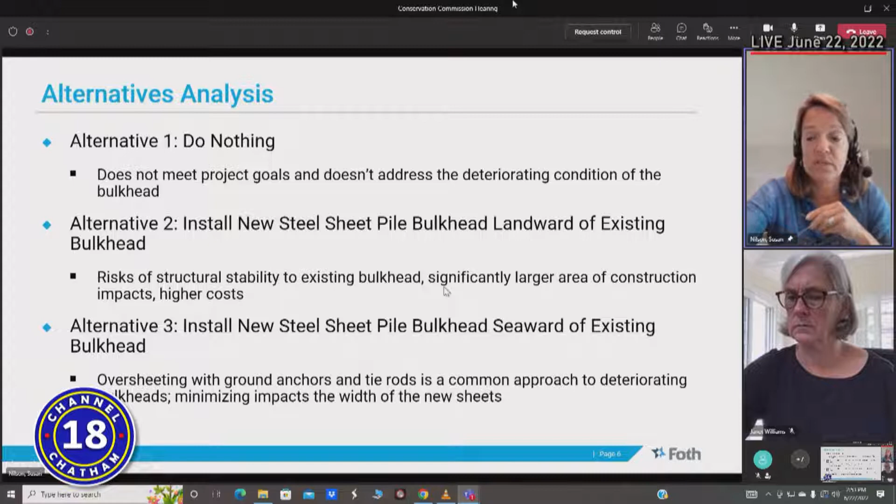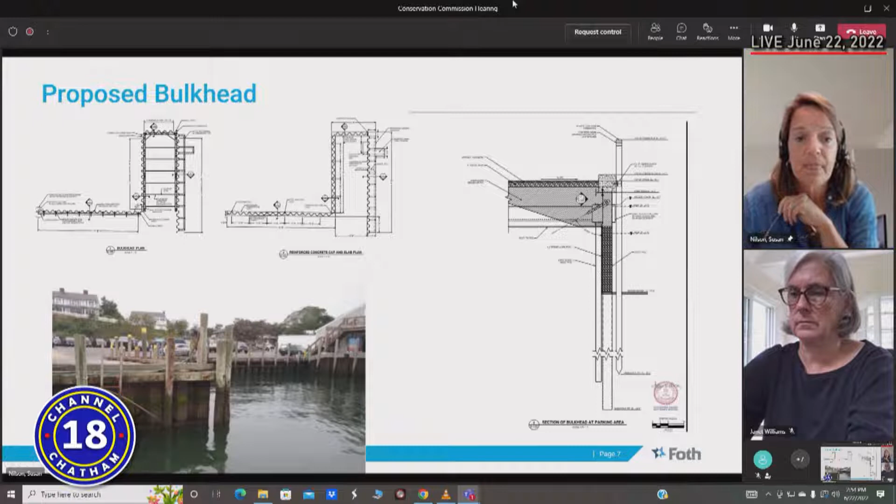The walkway - this is really minimal impact. There's a little bit of paving just to square off and create a clean edge. We're going up to about a foot away from the property line. As described, this is just to be able to keep pedestrians safer and get them around the perimeter, versus having them throughout the entire site.

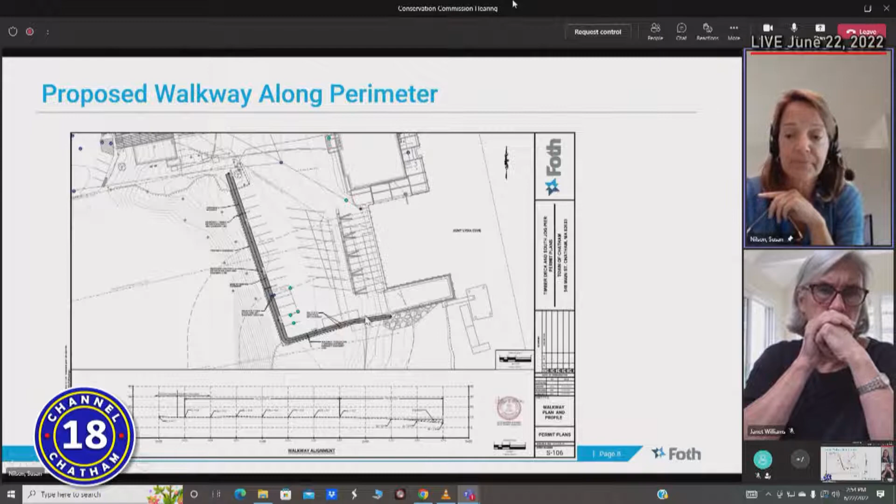And then that oversheeting does impact about 66 square feet of blue mussel habitat, and as I showed, that is just at that eastern edge of the South Jog. But we do have a removable aspect.

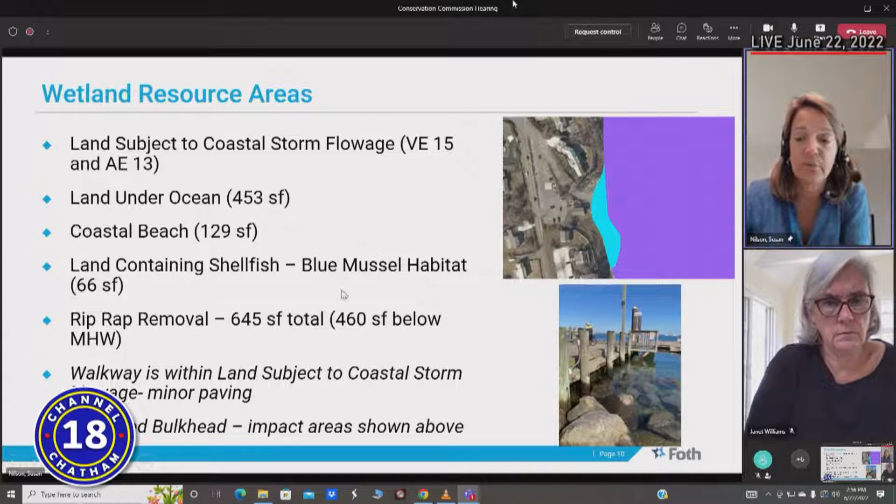Our proposed bulkhead will use oversheeting, and we'll have ground anchors so we don't have to excavate or disturb this area from the surface. Those ground anchors are installed at an angle as shown in the cross section, and this bulkhead will be incorporated using a tieback system.

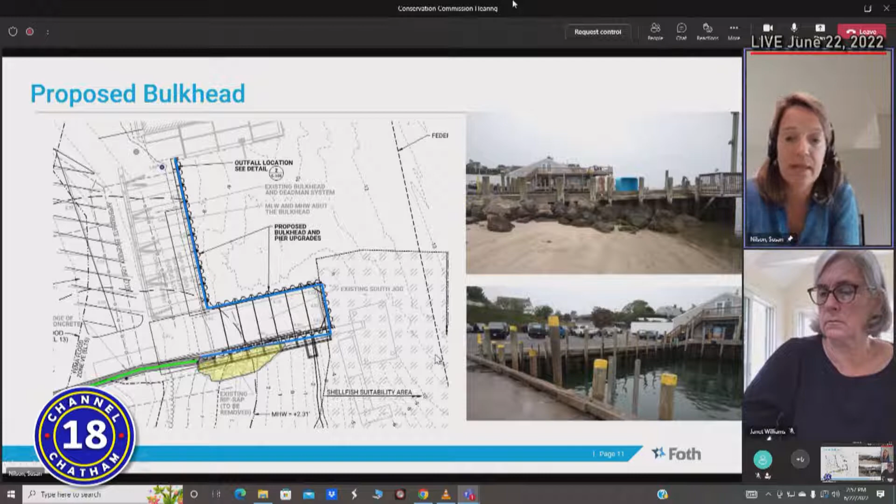So here, oversheeting really is the only option. There's not a way to come in behind here without risking the stability of the existing bulkhead, for either case - whether you look at the wharf or the section here with the dead man. And again, here's the shellfish suitability line.

For construction methodology, we envision the bulkhead installation will be completed from either a land-based or water-based crane. We wanted to leave that flexibility for the contractor's means and methods. We anticipate it'll probably be land-based, but they may want to bring materials in or work from the barge for portions of it.

So we think it's important, prior to the start of construction, to require the contractor submit a site management plan detailing procedures for material storage, cleaning of the site, containment of debris, and silt curtain installation and maintenance, which we're committing will be provided during all in-water construction activities. We propose that plan be submitted for review and approval of the Conservation Commission agent prior to the start of construction.

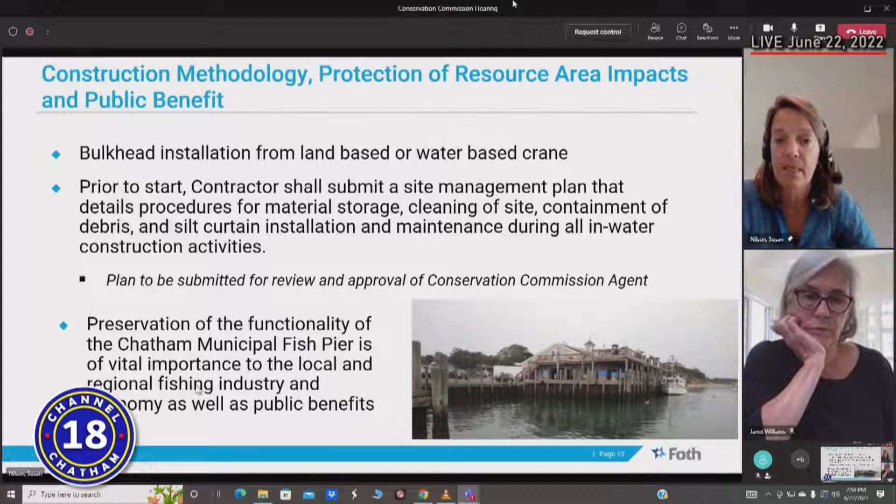I just wanted to add that preservation and functionality of the Chatham Fish Pier, as Dr. Bob said, is really critical. It's of vital importance to the local and regional fishing industry and economy, as well as the numerous public benefits of this site. So with that, I'll open it up to questions, and I can stop sharing.

All right, thank you. Anyone have any questions? Zero questions. I'll have a question, while people think of theirs.

That presentation of the slides was very helpful to me, because the map showed key elements I couldn't pick up on the black and white copies of similar slides I got. So the walkway that's going around the parking lot - is that going to share any part of the parking lot, or is it all new pathway?

You're muted. All right, thank you. It does share part of the parking lot. We really were constrained - we went up to within 1 foot of the property line. So in order to have the width of the pathway, we had to encroach slightly on the parking area.

Oh, so the pathway will then go to the property line? We went 1 foot up, one foot offset from the property. 1 foot away from, okay.

Part of the thinking was that within that 1 foot, because we're adding some pavement, and stormwater is always an issue, especially for me - the thought was, with that 1 foot between the edge of the pathway and the property line, we will do a little bit of a grass swale and direct any runoff from the new paved area into that grass swale, taking advantage of it. There's very limited opportunity down there to do any kind of drainage installation.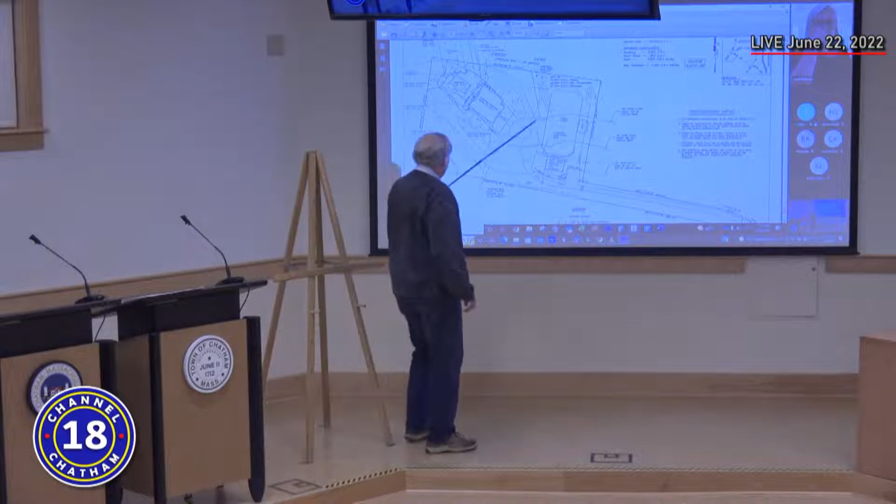All right, great. So we're asking for walkways. Oh, I'm sorry, you have to stand up the mic. Okay, I don't have my laser pointer. Nikki can sort of move the mouse around where she thinks you're pointing to. Oh, okay, well let me just point them out, and then I'll come back to the phone. All right, how's that? So we have here, here, here, here, and here. Okay.

So the walkways are the ones between the parking and the guest house. That's within the 50-foot from the top of the bank. Between the parking and the tennis court, which are stepping stones, the patio area and the driveway, which are also stepping stones. Incidentally, there were stepping stones already there, but they've overgrown so much with grass that they're invisible now, so that's it. And then there's some paving outside the bulkhead and outside the existing shower.

All right, so that's one section. And then the second section is this constructed landing off the existing house, and that extends into the 50-foot. So I want to leave that separately for a second. The walkways and incidentally that landing are all in areas that are now either existing lawn or, in this case, window wells.

So the landing, because of the 50-foot buffer, is going to have to go before the zoning board for approval because it's a structure within 50 feet of a coastal bank. Could I ask you to walk over and point at the landing? I'm not entirely sure I know what that is.

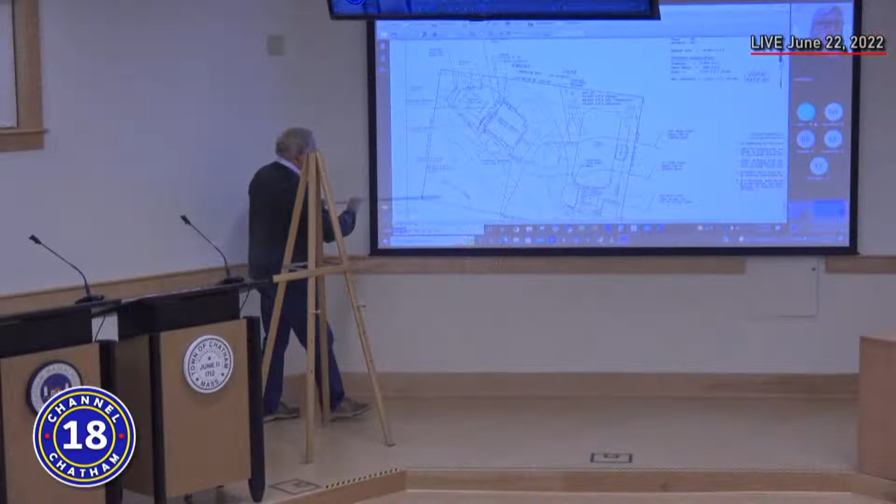That whole thing, plus the steps here. Right. So...

We're going to augment the mitigation to compensate for the increased disturbed areas. Now, I looked at the table that I had listed, and it was sort of incomprehensible to me a little bit, so I did this so we could easily see it. Good, it wasn't just me then.

So you can see that it's divided up into the square footage for the paving and for the landing, and divided between that portion of the square footage inside the 50-foot and outside. It all comes to about 1,200 square feet of mitigation.

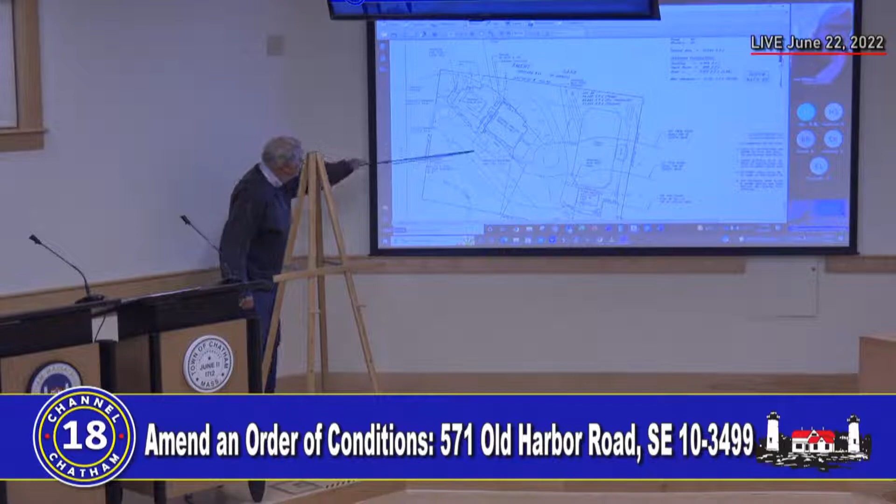So the proposed mitigation, I'll walk up there again. Here, here, here—that section was the original mitigation for the original order of conditions. So we're expanding that, because of the coastal bank dynamics here—it's really not a coastal bank because it's so far from Chatham Harbor. The important thing, I think, is the isolated wetland. We've tried to separate that, get rid of invasives, eliminate portions of lawn, and add native plant material. Basically it. Oh, okay, thank you.

Well, since we're talking about that large mitigation area—you say for the previous, you came before us in December or something like that? Yes, for a variety of things, for phase one, and then went away. Right, now you're back. My notes from what you were asking for in phase one, I'm having a hard time matching that up with what you're asking for now. Okay, so before I get ahead of myself—

No, go ahead, I want to hit this mitigation part first. When I look at that large mitigation bed, I see hostas in there, I see hydrangeas, which are obviously non-native. I'm wondering if we're talking about the same thing.

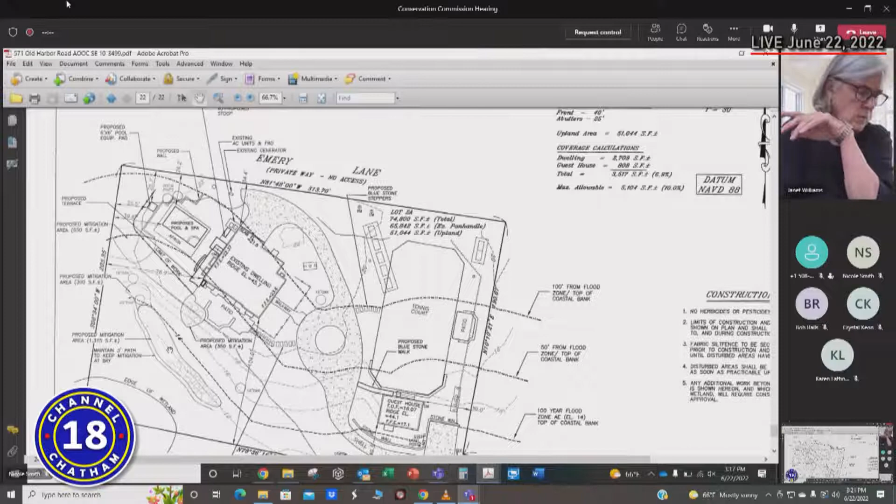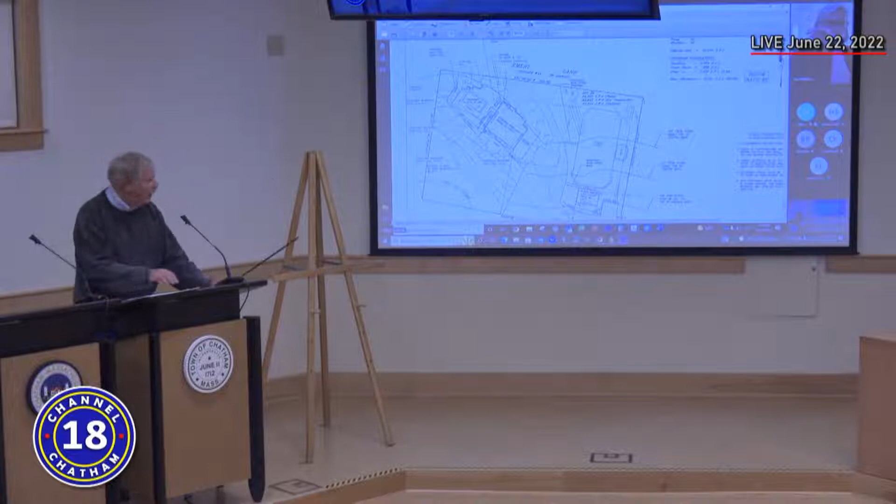Okay, let me go as I understand what we propose and what we're going to do. Let's talk about this area here. That area has a fallen tree, and now one that's blown over, and it's largely overgrown. When you come down further than that...

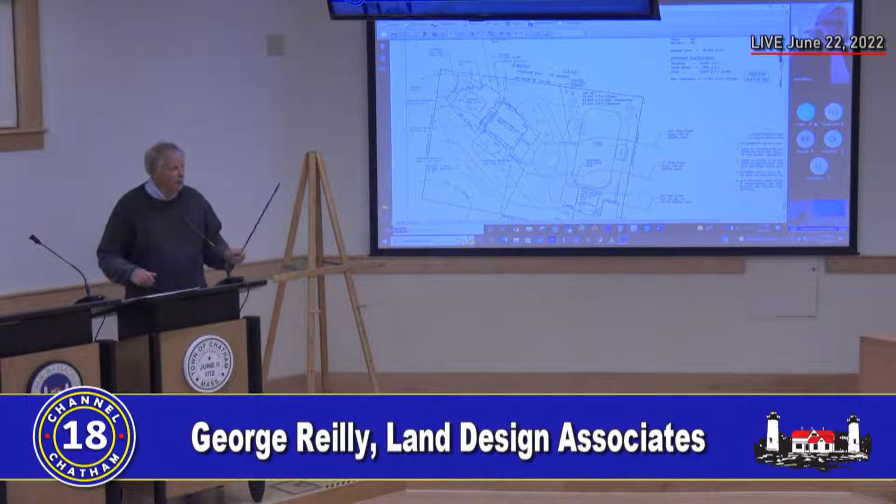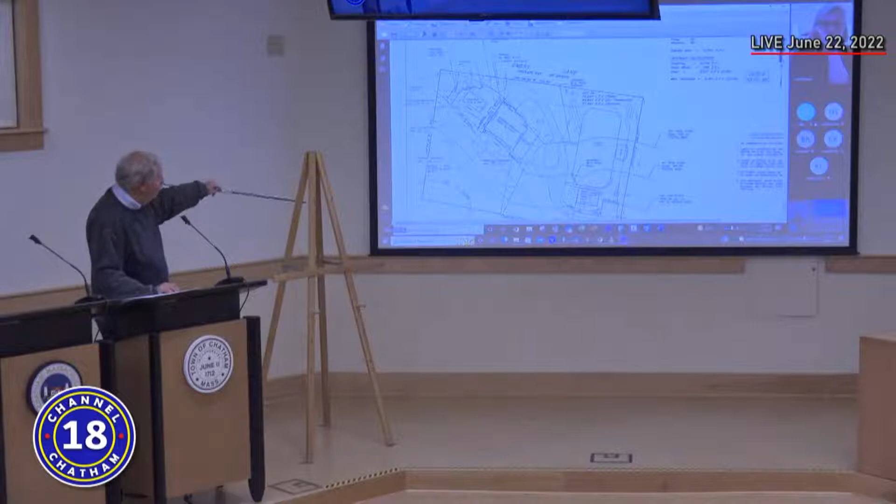Here, that's where the ornamental plants are, I think, that you're referring to. So all this area abutting the wetland, we were going to create a pathway to separate it so the invasives could not get into that area, take the invasives out of that big swath, and replant that area, which at the time—now it's gotten very overgrown—was mostly overgrown lawn and had been mowed. Take that out and put in the proposed plants.

Oh, thank you. Now, can I work this? Ah, brilliant. So this area here, we were going to eliminate as much as we can of the invasive plants there, and plant in the plants listed on the plant list.

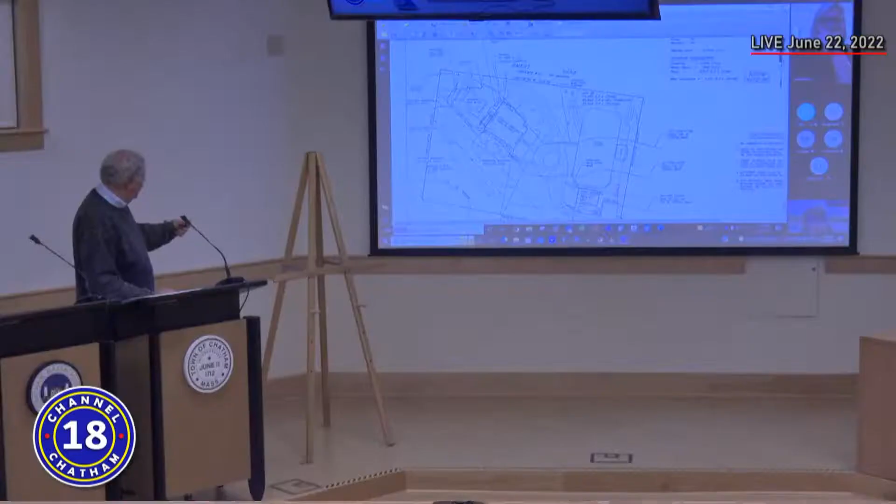So you're saying the bed I was looking at, thinking it was that, is actually not shown here, but further this direction? Okay, right. All right, and we were going to extend that up this way. There's a tree there.

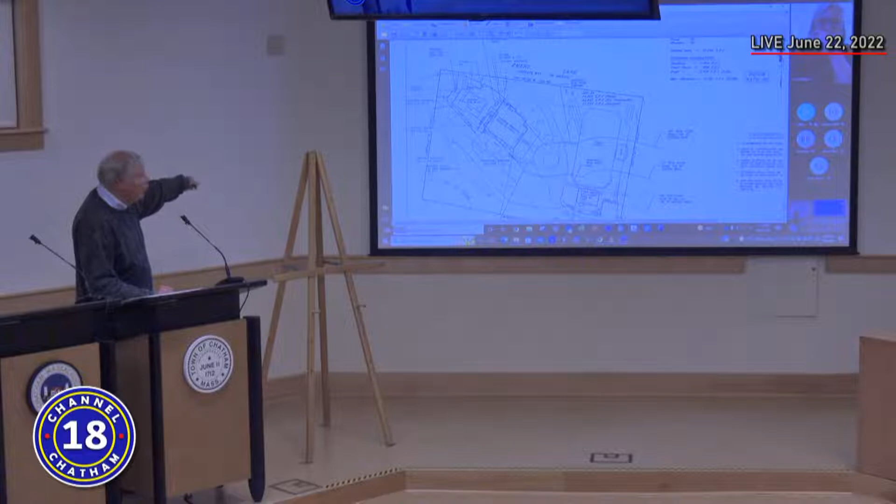And then this area here is now lawn. All right, so we could take that lawn out and put in the native plant materials to try and connect this whole swath up, to separate that. That's the plan.

So, going back to what I have in my notes for the previous Phase 1, I have written down a deck. A deck? Yeah, maybe I wrote it down wrong, but that's what I have. I have stairs, I have pergola. Oh, I don't know where that came from. Okay, so that's out.

Yeah, I think originally we had a kayak rack we were proposing in here, and we're eliminating that. All that was over there? Yes, and that's gone. So originally it was construct the pool, terrace, retaining wall, and kayak rack.

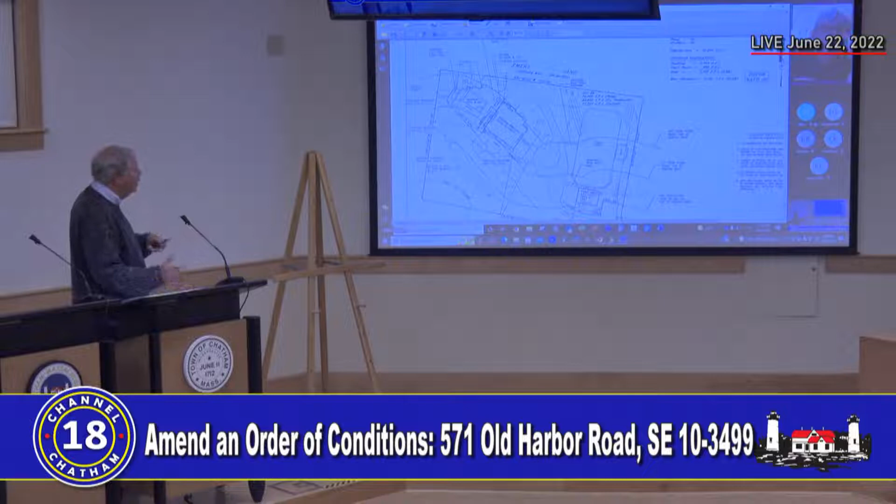And then on December 8th, it was Phase 1 for construct a deck, stairs, and pergola. Deck, stairs, and pergola—yeah, that's where I'm confused. I'm sure this may have gotten confused with that, because this has a pergola over it, but it's not a deck, it's a masonry construction. Okay, but I think we're just arguing over minor things. I mean, it's obviously a constructed area.

You can make the case that they're equivalent, but clarity is always good. So the deck is the landing, and that has coverage over it — it would have a pergola over it, but not a roof. So you don't have to worry about runoff from the roof there. It's good to get that cleared up.

So what you asked for in Phase 1 is not really what you're asking for in Phase 2. That's correct, that's the confusion. Okay, I'm going to step back now and let anybody else ask questions, because that was my major issue there. Anyone?

I think perhaps some sort of colored plan might be helpful to call out the mitigation areas. We could do that — I could submit that easily colored, because it is difficult to see the boundaries of your mitigation areas in this plan. I agree.

I think we can make that. Do we have a planting list? Yes, the planting list is on the plan here — it was on the Ryder and Wilcox plan.

And the planting list has been augmented to compensate for the additional mitigation area.

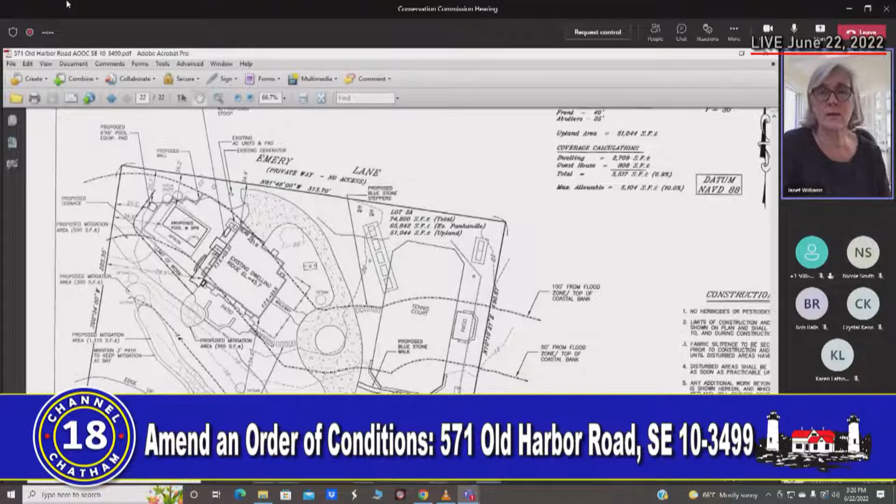This coverage information that you handed us — what we asked for is to have this in our standard format. Yes, I'm aware, I just did that briefly this morning and wanted to make sure it was clear here. I'd be happy to put that on the same format you have, so that's what we need to have for the record, instead of this, because it just becomes hard to go from one format to the other. Right, I understand.

But are there any other questions or concerns with the proposal? I was just going to ask, the existing trees shown on the map — those are being left alone, the oaks and whatnot? Yes, we're not taking any trees, no.

I have one question — the landing or the deck, whatever you want to call it — is it pervious? No. So it'll be like a bluestone terrace, more like that — it'll be wet laid.

We have to deal with the window wells, because you have to have a grate over the window wells, so it has to be constructed that way, I think. Okay, and it's pitched away from the house? Yes, that's correct.